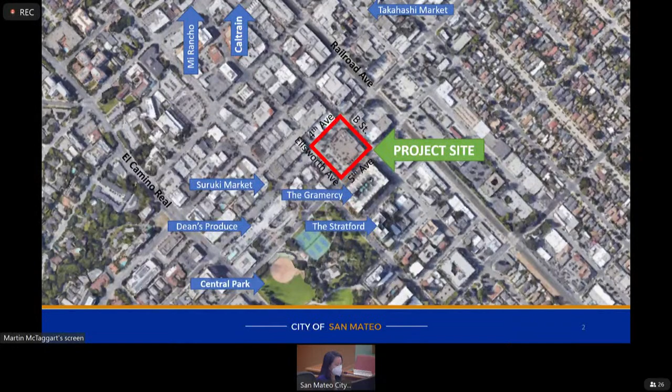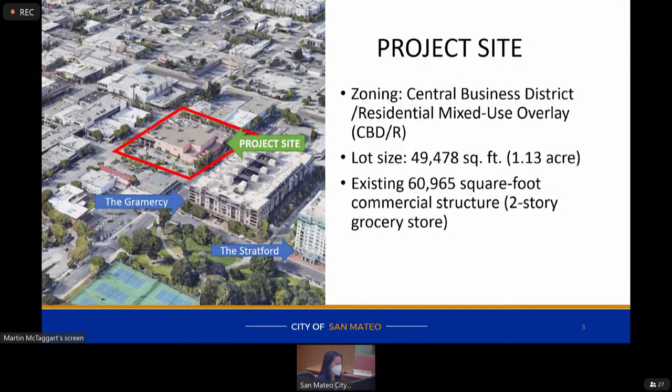There are some multifamily residential buildings nearby, such as the 6-story Gramercy building and the 10-story Stratford building to the south. The site is located in the Central Business District zoning district with a residential mixed-use overlay, where retail, office, and residential uses are allowed. The site is 49,478 square feet, equivalent to 1.13 acre. The existing grocery store is approximately 60,965 square feet and is 2 stories in height.

On the center of the screen is an image of the project site along the 4th Avenue frontage. To the left, top, and right are images of commercial buildings surrounding the site, mostly 1- and 2-story buildings for restaurants and stores. On the bottom is an image of the Gramercy, a multifamily residential building with 145 units, directly to the south across 5th Avenue.

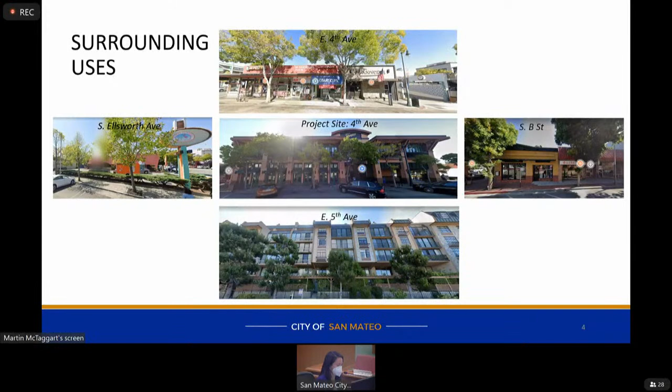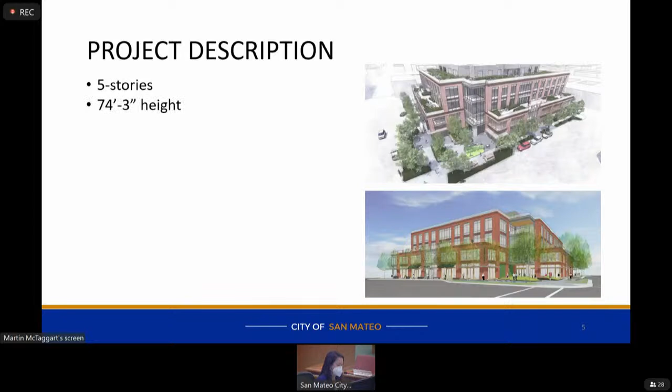The project proposes construction of a 5-story mixed-use building approximately 74 feet in height. The building would have a floor area ratio of 3.1, for a total floor area of approximately 49,000 square feet. On the ground floor would be a grocery store of 17,000 square feet. On the 2nd through 4th floors would be 104,000 square feet of office use.

On the 5th floor would be 10 rental units: 8 one-bedroom units and 2 studio units, all dedicated to the low-income level, which is 80% of the area median income. The project also includes 221 off-street parking spaces, located in a parking garage on the surface level and extending 2 levels underground.

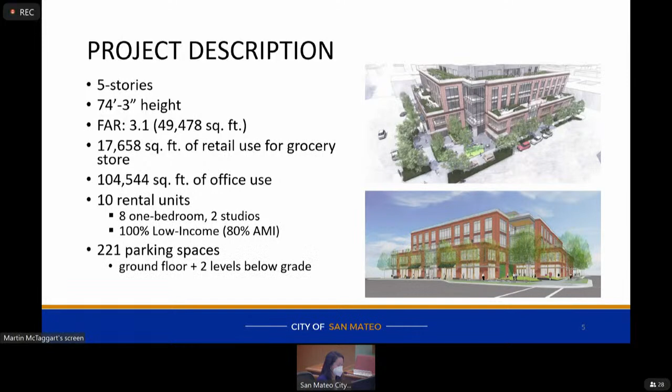Here is an image of the site plan. In yellow is the retail space for the grocery store, and in gray is the ground floor of the parking garage. The parking garage is accessible from 5th Avenue, and a ramp leads to 2 more floors of parking below.

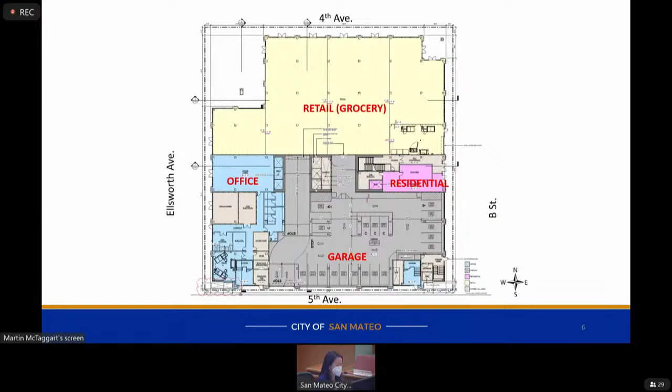In blue is the ground floor for the office. There are bike storage and trash rooms, as well as an elevator that leads to the 3rd floor of offices above. In pink is the lobby and the elevator to the residences on the 5th floor.

Here is an image of the north side of the building fronting 4th Avenue. There are multiple entrances to the ground floor grocery store along the primary frontage. On the upper floors are the office units, which includes an exterior balcony. Behind the glass railing on the 5th floor are the residential units, which are stepped back and not very visible from the pedestrian level.

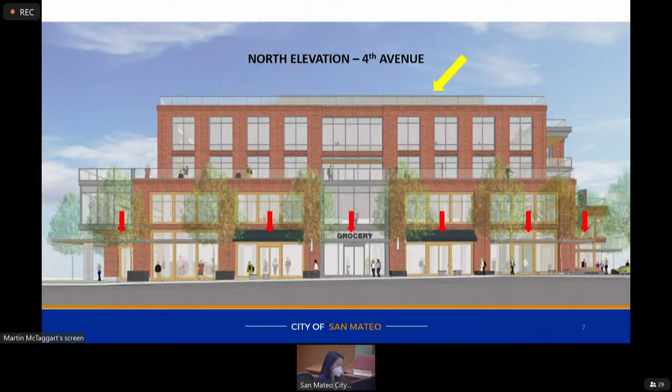There are currently 39 existing trees on the project site, of which 38 are considered protected. The proposed project includes the removal of all trees and would plant 37 new trees. The applicant would also provide a payment to the city's tree planting fund as necessary.

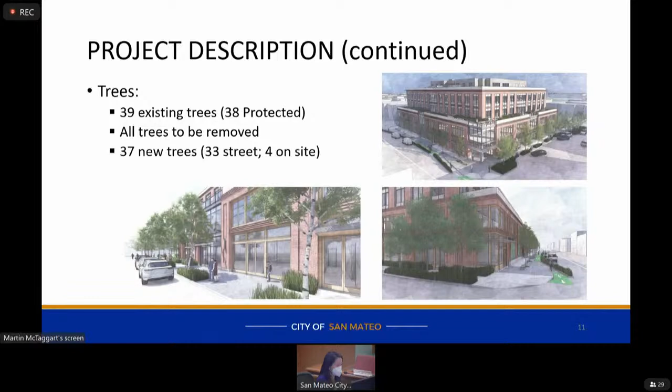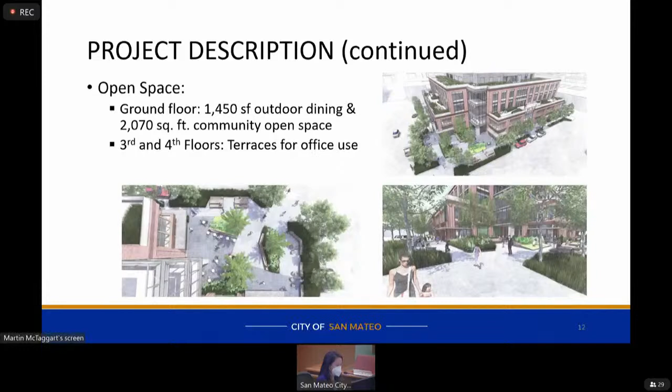The project includes open space throughout the site. On the ground floor is an outdoor plaza at the corner of B Street and Ellsworth, which consists of 1,400 square feet of outdoor space and 2,000 square feet of community open space. There are terraces on the 3rd and 4th floors of the offices, and a roof deck on the 5th floor for the residents.

This project was previously considered by the Planning Commission at a study session on September 14, 2021. The Planning Commission had requested the applicant to add more landscaping, including street trees on B Street, adding more housing units, including the addition of 2 and 3 bedroom units, and consider placing the loading zone on Ellsworth instead of B Street.

As part of the formal application, the applicant did not change the number of residential units or the bedroom count. However, the applicant included minor design changes and removed the Class 4 bike lane on B Street per City Council direction. The project proposes to retain the Class 3 shared bike route instead and add street trees and living walls.

These revised plans were presented to the Planning Commission at a public hearing on November 17th. The Planning Commission voted 3-2 to recommend approval, including 10 residential parking spaces, which staff will discuss in more details later.

The project is not subject to the Housing Accountability Act because the housing units constitute less than 2/3 of the total square footage. However, the project is subject to the city's commercial linkage fee because the project proposes over 5,000 square feet of commercial space.

The commercial linkage fee is intended for non-residential developments to mitigate their impact on the need for affordable housing in the city.

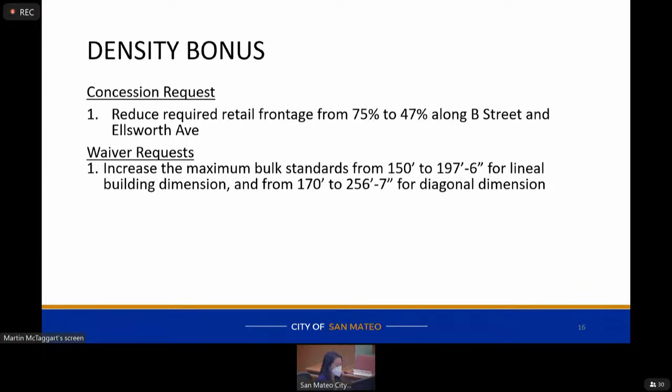The first waiver request is to increase the maximum bulk standards from 150 feet for the lineal building dimension to 197 feet 6 inches for portions of the building above 55 feet in height. For the diagonal building dimension, the zoning code requires a maximum of 170 feet, and the applicant proposes 256 feet 7 inches.

The second waiver request is to increase the distance for the street wall build-to-line standards from a 0-foot setback requirement, as buildings are to be located along the property line, to a 4-foot 6-inch setback instead. This applies to the 4th Avenue, Ellsworth, and B Street frontages in order to provide a larger sidewalk.

The third waiver request is to increase the build-to-line exception from 25% to 30% along the Ellsworth Avenue frontage. As mentioned previously, the zoning code requires buildings to be built up to the property line, but allows an exception of 25% when the space will be used for an outdoor plaza. The applicant is requesting an exception of 30% along the Ellsworth Avenue frontages to allow a larger plaza.

The fourth waiver request is to increase the maximum floor area ratio from 3.0 to 3.1, which would increase the floor area from 148,434 square feet to 152,533 square feet.

The last waiver request is to not provide the required off-street loading space requirement on the private property. Instead, the applicant is proposing the loading zone to be located along the B Street public right-of-way.

Staff has evaluated the concession and waiver requests and have not identified any concerns relating to public health or safety, or conflicting with state or federal laws, in order to deny the requests.

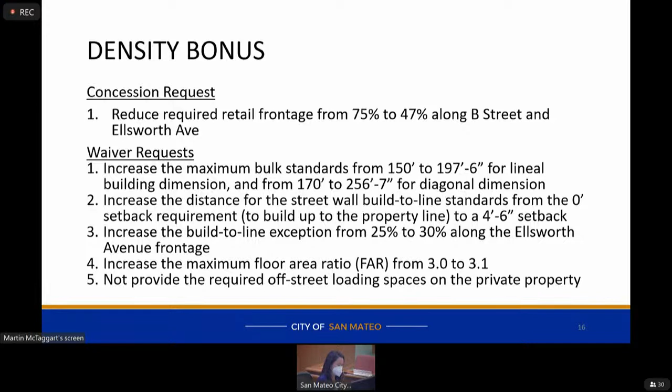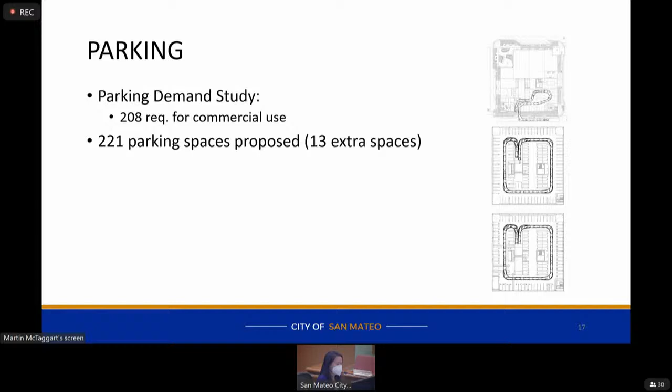A parking demand study was completed for this project, which determined that 208 parking spaces are required for the commercial uses. The project proposes 221 parking spaces, which exceeds the requirement by 13.

The project initially did not propose any residential parking spaces as allowed under the state density bonus law. However, by constructing low-income units to satisfy the city's commercial linkage fee requirements, this triggers the city's below-market rate resolution, which requires that BMR units have access to all on-site amenities. Staff will discuss the specific number of residential parking spaces later in this presentation.

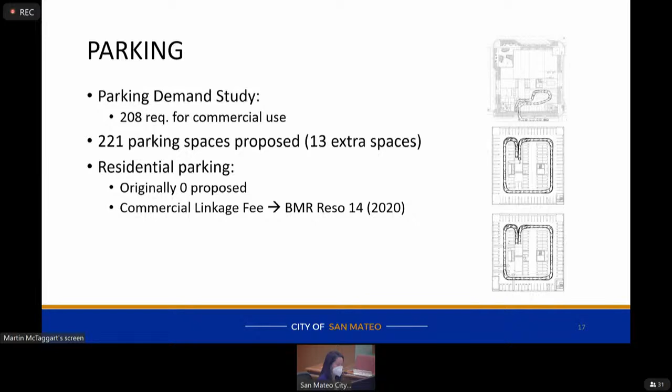To analyze the traffic impacts of this project, the city's transportation consultant, Kittelson, prepared a transportation impact analysis. Overall, the TIA determined that the proposed project would generate fewer vehicle trips than the existing conditions.

Grocery stores generate more trips than office and residential uses, so even though the proposed project will be larger in terms of total square footage, the total number of trips will be less.

The project will also not cause a significant VMT impact, as the project is within 1/2 mile of a high-quality transit area and is located within a low VMT area.

The TIA also concluded that the project would not result in any adverse level of service effects, as it would maintain a minimum of level D at all signalized intersections and level E at all unsignalized intersections.

To help further reduce overall single occupancy vehicle trips, the project will implement a transportation demand management plan. The trip reduction strategies include Go Pass and Way to Go transit passes, along with other measures.

Several entitlements and approvals are required for this project. The first entitlement is a site plan architectural review, or SPAR, for the construction of a new mixed-use building. The project design meets the required findings as it is in scale and harmonious with the character of the neighborhood.

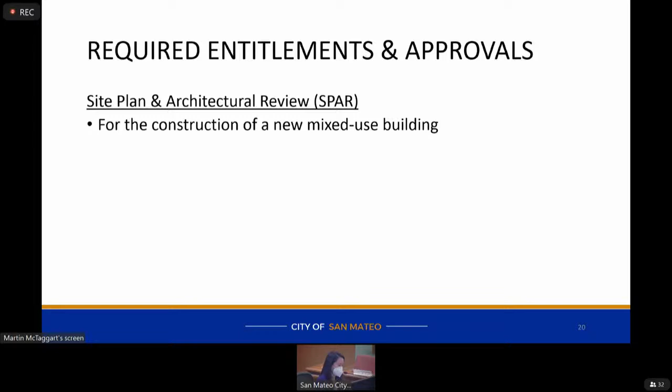The project also requires a site development planning application, or SDPA, for the removal of substantial vegetation, including protected street trees.

An approval is also needed for an affordable housing plan for the construction of 10 low-income units to satisfy the city's affordable housing commercial linkage fee requirement.

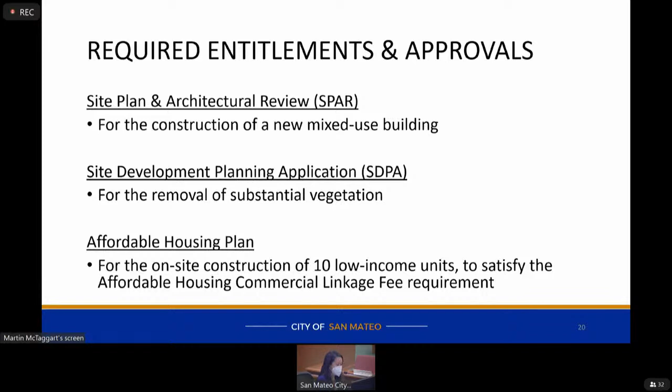Staff has reviewed the proposed project, and the findings for approval are noted in the resolution in Attachment 1.

Per the California Environmental Quality Act, an addendum to the Downtown Area Plan IS/MND and 2030 General Plan EIR has been prepared for this project.

The addendum demonstrates that the proposed project would not result in any significant impacts not already considered under the previously certified EIR and IS/MND, nor would there be a substantial increase in the severity of the significant impacts previously disclosed.

Staff has completed public noticing for tonight's meeting in accordance with all public noticing requirements, including noticing neighbors within 1,000 feet of the project site and those on the interested parties list. More than 2,000 residents, businesses, and interested parties have been notified of tonight's meeting. 4 placards have also been placed on the project site.

Staff has received approximately 31 public comment letters as of date, most of which express support of maintaining a full-service grocery store. Staff has included a condition of approval prioritizing leasing the retail space to a grocery store and requiring proof of a good faith effort to do so prior to tenanting to another retail use. The proposed grocery store size of 18,000 square feet is consistent with other smaller grocery stores, such as the Draeger's in Los Altos.

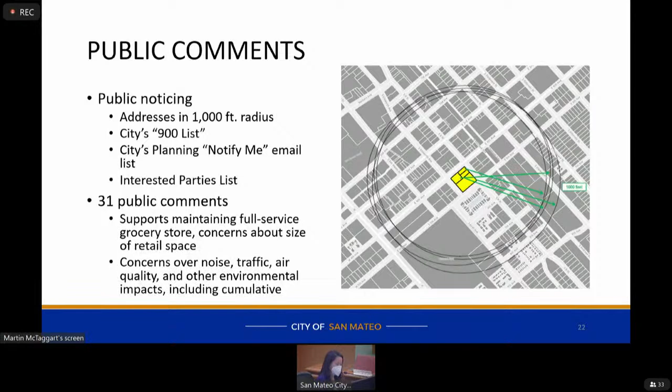There were also concerns regarding noise, traffic, and other environmental impacts. The project has been conditioned and includes mitigation measures to offset such impacts. There were also concerns regarding cumulative impacts, such as with traffic impacts. The TIA did analyze 2 scenarios during the project's opening year, which included projected traffic from the approved projects at 480 East 4th Avenue, 406 East 3rd Avenue, and 405 East 4th Avenue.

Staff received one comment pointing out an error regarding 5th Avenue being an arterial road. However, staff want to clarify that 5th Avenue at the project site is actually a local road, and that this correction does not affect the environmental analysis. All of the public comments have been forwarded to the City Council.

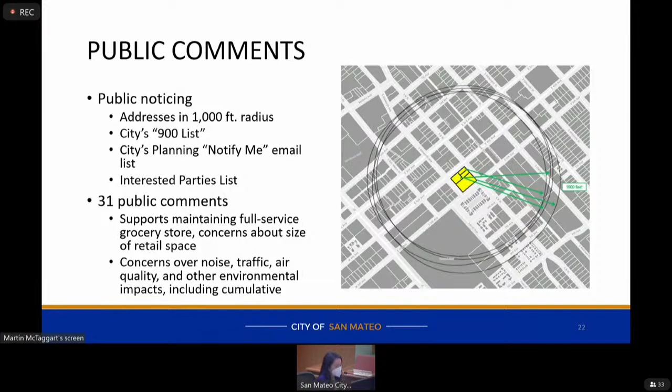One discussion topic staff wanted to raise tonight is regarding residential parking spaces. Since the construction of below market rate or BMR units are proposed to meet the city's commercial linkage fee requirements, this triggers the city's BMR resolution, which includes providing BMR residents with access to all on-site amenities. The applicant agreed to provide 6 residential parking spaces and none if the municipal code's security closure requirements cannot be met. The city's requirements mandate that residential parking spaces shall be secured and accessible only to residents.

However, it does not take into account mixed-use projects that could make parking for residences infeasible. Therefore, staff has built in flexibility into the condition to require these spaces only if the security requirements or an alternative means of compliance can be met.

It should be noted that the zoning code requires 15 residential parking spaces, and the project provides 13 extra spaces. After discussion of the hearing, the Planning Commission recommended 10 residential parking spaces to the council, which equates to 1 space for each unit. Staff is requesting the council to discuss and determine the appropriate number of residential spaces, which staff will incorporate as a condition of approval as necessary.

Here is the condition of approval as recommended by the Planning Commission and subsequently modified, which states 10 parking spaces instead of 6. This condition was further discussed with the applicant, and additional edits were made to this condition based on their input. However, the applicant would prefer to provide 6 spaces instead of the 10 that were recommended by the commission.

We'll go through these quickly. As Wendy pointed out, the ground floor is 18,000 square feet, designed for a grocery store. The office use is around 105,000 square feet, floors 2 through 4, with a roof deck on the 5th floor.

The workforce housing will be at the 80% AMI level, 8 one-bedrooms, 2 studios. We'll have a dedicated lobby, laundry room, bike parking, and a roof deck for the residents.

We're partnering with Alta Housing on the affordable component, and Cheryl Klein, the COO of Alta, is on the line tonight if you have any questions about their partnership with us.

One interesting stat on the housing: I learned that only 25 low-income units were built between 2017 and 2021 in that AMI range, and there's currently a wait list for those units. So that's only 5 per year during that window.

Additional information on the housing: B Street South will be the only private mixed-use project to provide 100% affordable units. It would take 67 market rate units to generate the 10 affordable units. The city requires we provide 8 units or pay the commercial linkage fee.

We're providing the 10 at a cost of around $700,000 a door, including land. So around $7 million in value for the units.

The project does not seek additional office square footage through the density bonus law. We're just using the height above the 55 feet to provide the roof deck and the units. In other words, we're not taking full advantage of the state law to add more office to the project.

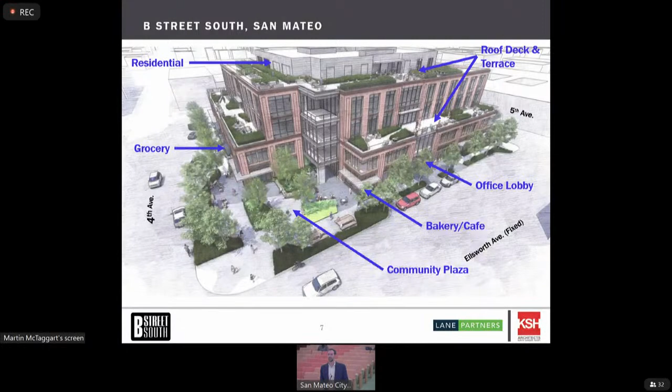This is the 5th floor. On page left, you've got the office terrace, the mechanical areas, which, just to point this out, the mechanical area on the roof is pretty robust, given that the grocery store is going to be a full commercial kitchen. So a lot of exhaust, a lot of mechanical equipment, and you've got to throw in the mechanical equipment for the residents and for the office. It's a very substantial mechanical penthouse area up on the roof.

The units line up, I'd like to finish this out. The units are in blue, there's 10 there. The studios are next to the stairs and the elevator. On page right, you've got the dedicated residential roof deck.

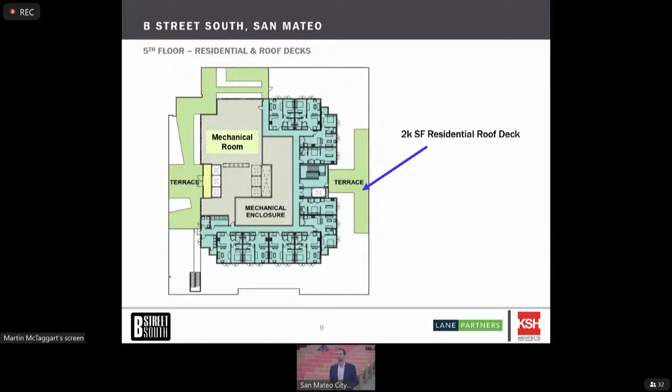This is a view of the residential roof deck. The goal here is to create a space for the residents to work, socialize, enjoy the fresh air, the good weather, and views from being up over 60 feet.

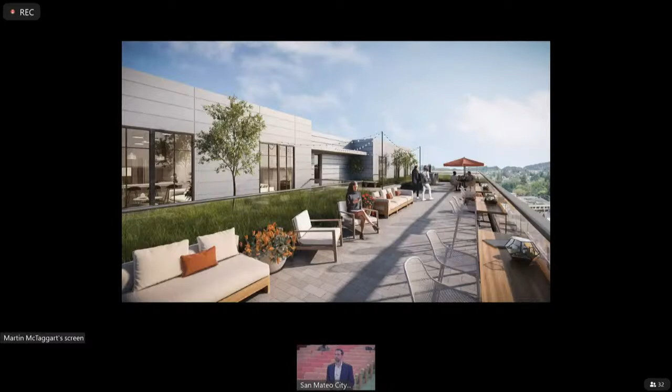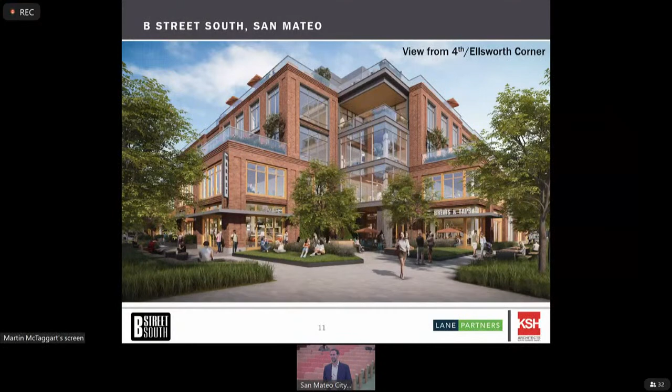Next slide, another view of the building from Ellsworth. Next slide, this is a view of the grocery store entrance on 4th Ave.

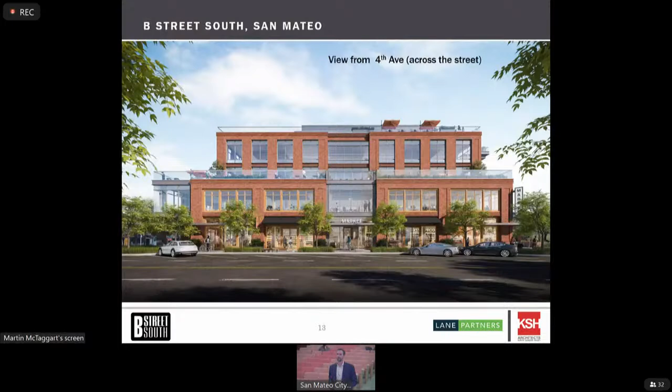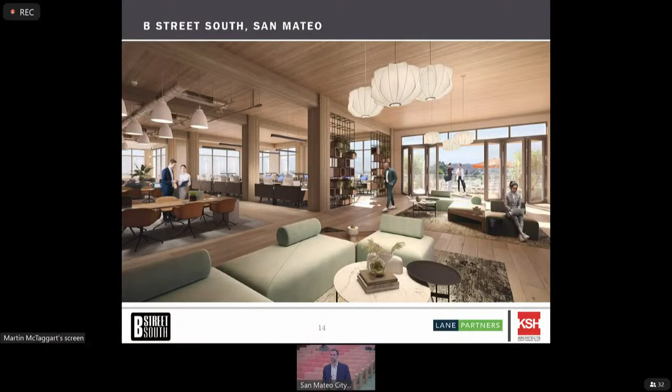This is a potential view of the office space. We're excited to announce tonight that we're going to build the project out of mass timber, which is a very sustainable way to build compared to concrete and steel. So we're excited about this. Depending on when we get the building permit, we could be the first mass timber project in San Mateo.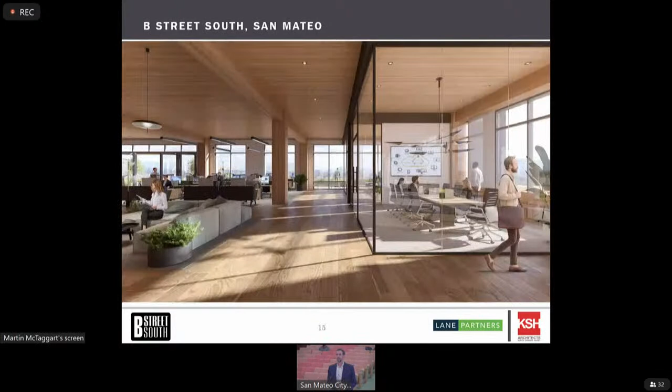Next slide, I included this. This is our project in Redwood City. People seem to like this. It's been mentioned in some of the Planning Commission meetings and by members of the public. We've got the same architect and construction team that's doing the B Street South project, so the historic brick that you see here is the same. It'll be a little different color for our project, but the same quality will apply.

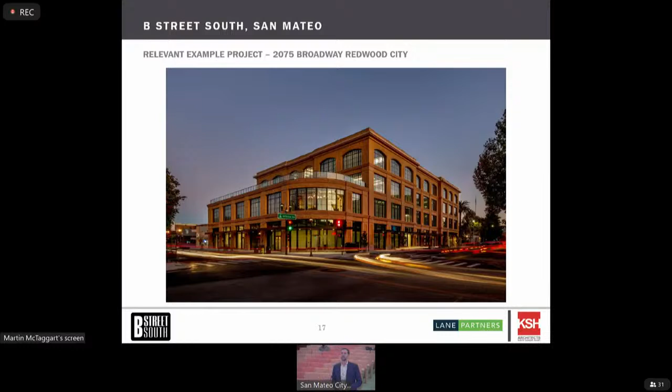Just to finish things out, I'm really proud of the community outreach efforts that this project has engaged in. Our project website has over 4,300 unique visitors and 13,000 page views, almost 400 comments, and Co-Urbanize, the company we've used to help manage this website, has said this is one of the most active projects that they have in their portfolio, and they do projects all across the country. So just wanted to highlight the outreach efforts we've gone through.

I'll just finish by saying, when it comes to the residential parking discussion that's at hand tonight, our baseline view is that the project is not required to provide any residential parking per the density bonus law, but we're willing to provide some. We're willing to work with council and staff tonight to come to a resolution on that. We're willing to provide 6, and if we can get to 10, and it doesn't impact the operations of the project, then we think there's a path to achieve that. So, open to discussing that together with you tonight. That's it, thank you.